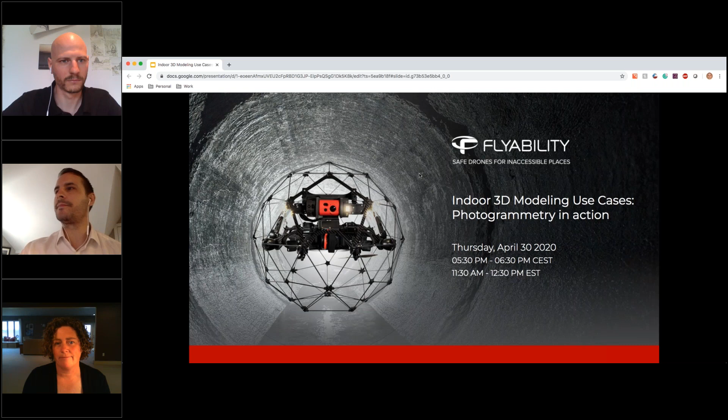And our star speakers today, we're going to hear from Lori McBean, who's a geospatial data specialist at UAS Inc., based in Sudbury, Canada. She's got a ton of experience visualizing data. And so she's going to be speaking to real use cases for indoor 3D modeling. This is something she does every day. We're really excited to hear from her and learn from her expertise.

And we're also going to be hearing from Gregory Spearlett, our professional services engineer here at Flyability, of course. Gregory's traveled the world doing trainings on the Elios 1 and Elios 2. He has a lot of experience doing hands-on work with inspections, so we're going to be hearing from him on the drone side of things. So we're really excited to hear from both of these folks today.

Really important point. We were actually talking to Lori just before we got on. Originally, she was supposed to be a keynote speaker at our user conference in March, which was going to be held in Denver, near the location of our new US office. But unfortunately, that couldn't happen because of the pandemic. And Lori was just saying that she'd much prefer to do this in person. I think a lot of us would, right?

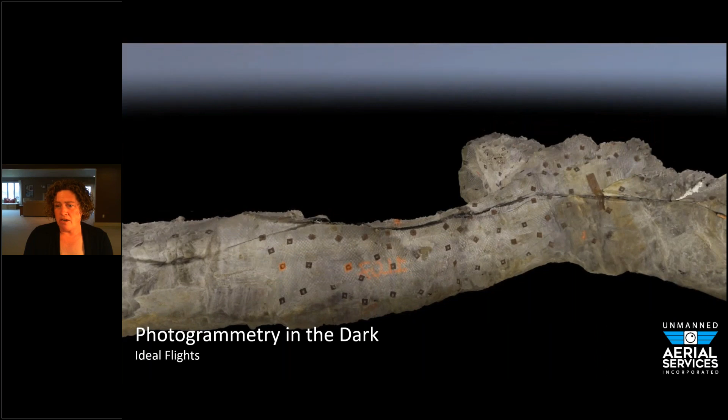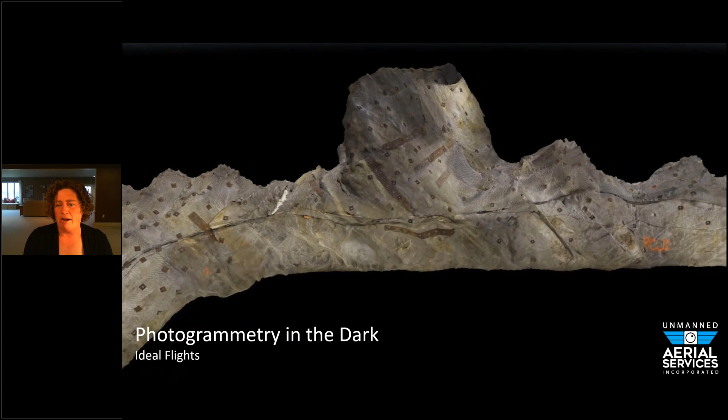So is there any technical problem with modeling underground? Absolutely not. So this is an example of perfect flight lines. You can see that despite the fact that this is all completely in the dark, the Elios provides more than enough lighting to create a well-lit model of a 3D underground environment. Now, you have to note that this is with perfect capture. So this is 4 flight lines, one along each of the ribs and one looking up at the corners. And we can piece that together, no problem.

This model actually took zero effort on my part. It was 4 video files brought into Pix4D with a couple of manual tie points only to join the flight lines together. But other than that, there is very little done to this model. This is basically click and go.

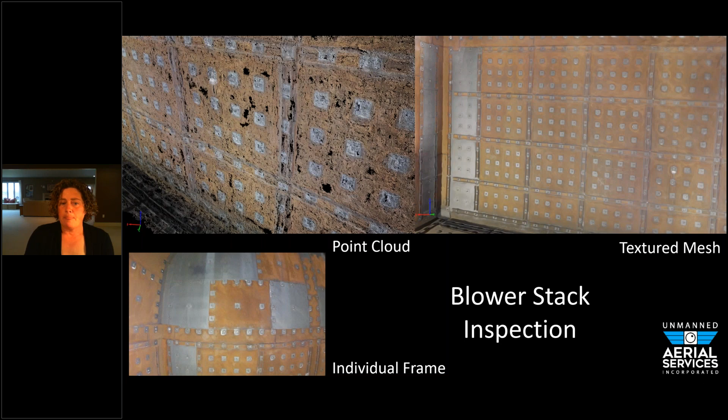And a similar example, this is a blower stack inspection, a large space. We had very good access to this space, so we were able to fly with ideal flight lines. You can see that you can generate a very nice point cloud, and your textured mesh comes out looking very, very nice compared to the individual frame, which obviously shows the fisheye lens and the effects on the geometry of your features. But if you look at the flight lines, we had very good capture.

So our pilots, like Will McKeever, are very, very talented at performing these inspections and covering the ground. And we've worked really hard at establishing what type of flight pattern works well for photogrammetry. All of this said, these are places where we have really good access and really good control. So I want to look now more at the realistic environments that we work in.

One of the main things that we do a lot of visual inspections on are bins and chutes. So they're really inaccessible. We don't have a very long time to capture them. They're narrow, and we never get an ideal flight pattern. So these will never be captured in terms of a photogrammetric flight. They're perfect visual inspections and give our clients everything they need just with the video, but we like to turn them into something a little bit more.

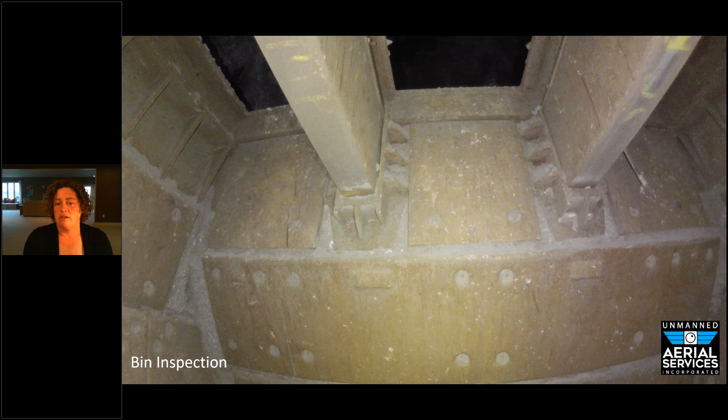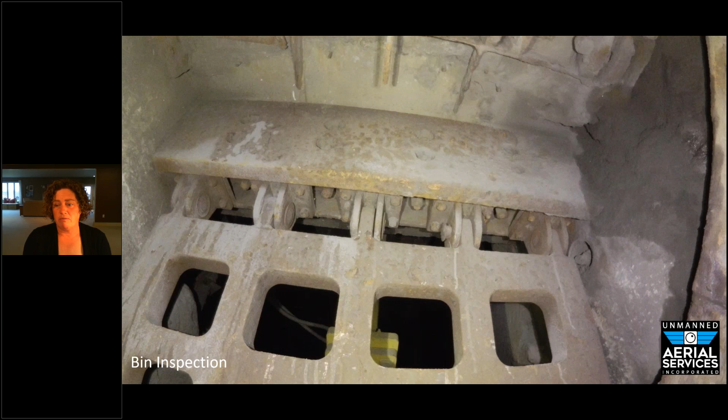So this is the type of environment. It's dark. All of the lighting is coming from the Elios, and we can get in and look at the things that the client is actually asking for. They want a visual inspection of this space. They want to look at their liners. They want to look at their mechanisms. And you can see that really they can see everything that they need to see just in the video. We don't really have a need to model this type of inspection.

However, we get into environments where they might be missing plates. A lot of these rock areas are self-mining. They erode and they create pockets and new spaces, and that needs to be measured. Also understanding the drawings that we have for these spaces, everything might be perfectly lined up, but once you get in there, you start to realize that plates, like on the right-hand side here, don't line up perfectly. And so that's sometimes the source of the wear and the abuse that these sites take.

So despite not being a photogrammetric flight, nothing specific about how we capture these flights, just a regular inspection, we can turn them into a fairly complete point cloud and a 3D mesh. They're not perfect. They're not going to win any beauty contests, but they provide us with a lot of really useful information. So the 3D mesh allows us to understand the things that we see in the video have a context. They have a location. We can tie those features to a place. We can map these all in mine grid coordinates, which means they can overlay them on any of their drawings.

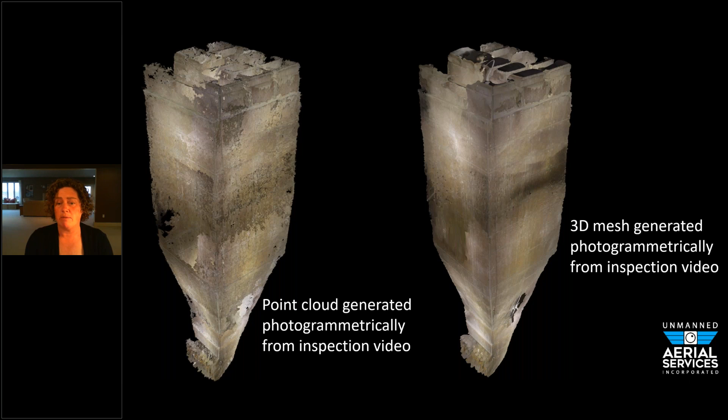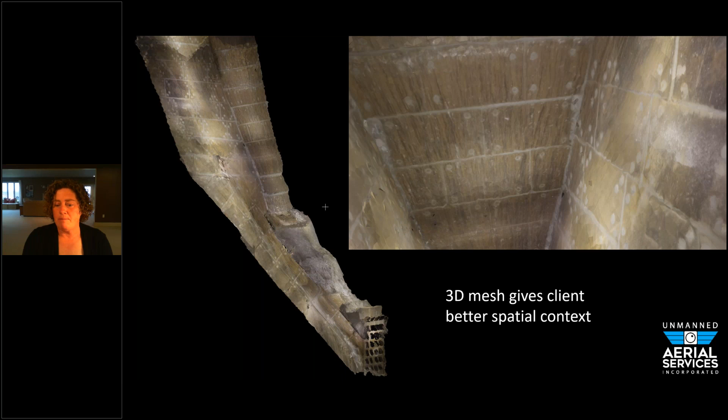In this particular case, we were looking at the space over the chute where the liners were missing and looking at the volume that was being eroded into the rock behind. And the 3D mesh can give us a really good idea of where that might be happening. But we can also look at the point cloud and the 3D mesh in terms of actually doing measurements, creating volumes, and comparing to what we thought was the case. So we can compare that then to the drawings, to the as-built. We can model what's going on. So we can produce that 3D mesh, and it's all coordinated, and it can go into comparison with any of their other data sets.

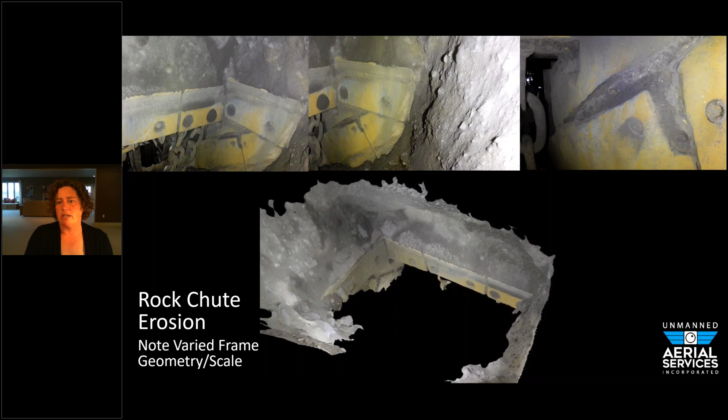So here's another example of an area that we get called into regularly, which is to monitor erosion above the head blocks where we have wear plates. You can see that in this case, it's eroded some of the rock behind there. The feature I wanted you to note on this is that if you look at the frames at the top, those 3 frames are all captured from slightly different points of view. They're obviously not ideal for photogrammetry.

If anyone has attended the photogrammetry webinar last week, we know that we want to fly in nice straight lines with good overlap. That's not our reality. In our reality, we get as much as we can in very few minutes. There's material coming down constantly. We try and fly as much as possible in a very short period of time, and then we model the best we can. And you have to throw it out to something like Pix4D to be able to manage taking different frames and different geometries and pulling that all together into a really useful model.

And this type of model, I would be using dimensions of those wear plates to scale the model and create something that's a metric data set that we can take measurements from and identify the volume of material that's been moved.

And this is another set of bins and chutes that we looked at last week. So 2 6-minute flights. Is it complete? No. So this was not flown as a mapping project. This is an inspection to look at areas of concern. There was a very short window to get in and cover this ground. So this is what we can produce with any inspection video. So any of your Elios videos you can run through and get a model of pretty much whatever you've covered.

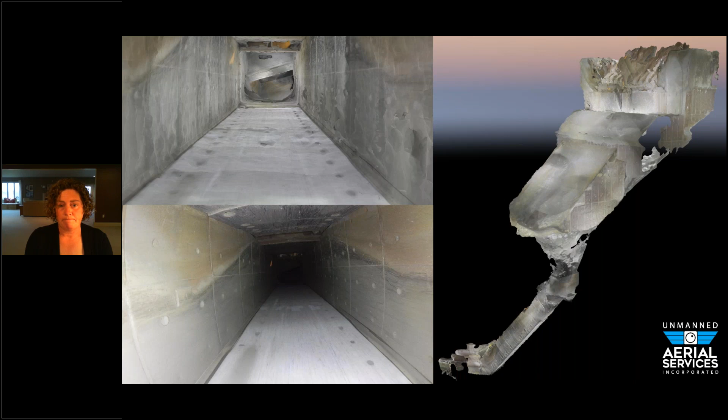So the photo at the bottom is an example of the type of access we sometimes have. So in the middle of that chute system, our pilot had to go through this very narrow little collar with obviously rocks suspended above the drone and a nice challenging environment to work in.

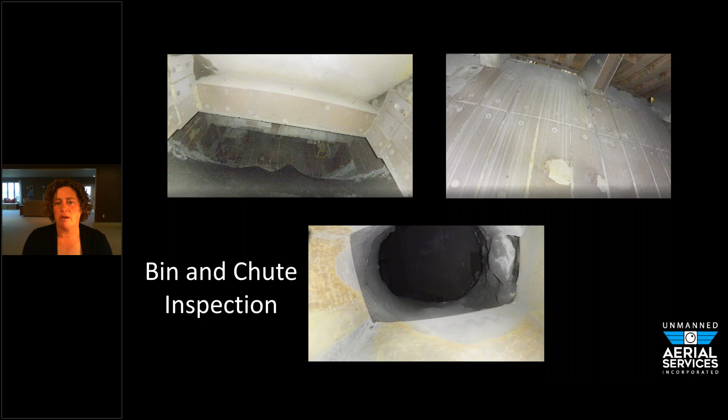And again, at the top, you can see that we capture a lot of frames with very differing geometry. We don't often have that ideal geometry, and yet we're still able to pull together a really reasonable model that gives us a lot more information than if we didn't model it at all.

And another area that we get called out to very, very often are mills. We fly them regularly for inspection. They're very difficult to open to provide better access, and it takes a long time. So the in-person inspections are really only done in shutdown periods. So this allows us to get in and out in a very short window from an access port and monitor

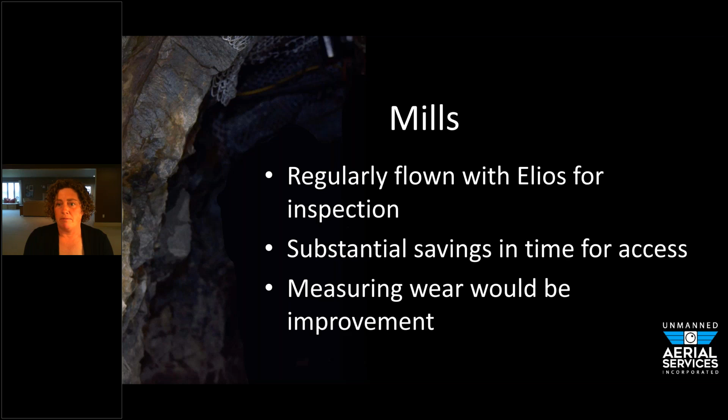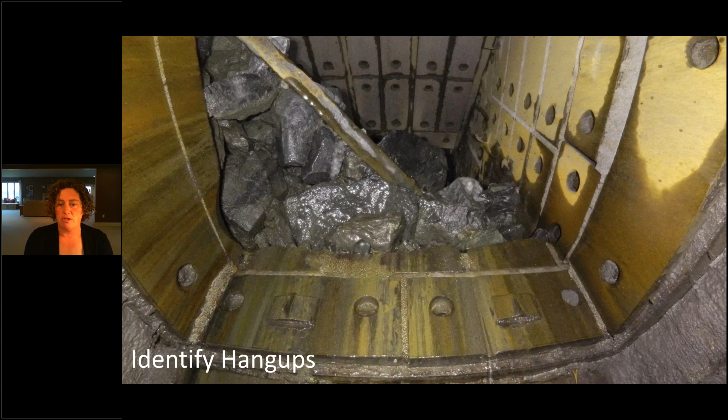the situation between shutdowns. So we can get into the chutes and identify things like hangups and what that material is, what's holding up the flow of material through the chute system. And then we can go into the inside of the mill itself and start looking at the wear on all of the wear plates and the materials inside.

Again, what I have to stress is these are not ideal situations. We do not have perfect capture. There's a lot of variation in terms of the geometry of the features that we're mapping. And we have a lot of noise, dust, and mist and other things affecting the frame capture. So if you look at the right-hand picture, you can see the effects of the reflection.

So as the drone is the source of the light, when it moves over a curved surface, that reflection follows you. And that poses a lot of really big challenges in terms of photogrammetric mapping. So basically that reflection causes those rounded surfaces to disappear. So that's a challenge that we still have to deal with.

There's things we can do to modify that. We can kind of turn off a lot of the front-facing lighting, which helps to cut down on that. And we can fly in slightly different geometry and try and make up for that with capturing those features sort of off the center of the frame.

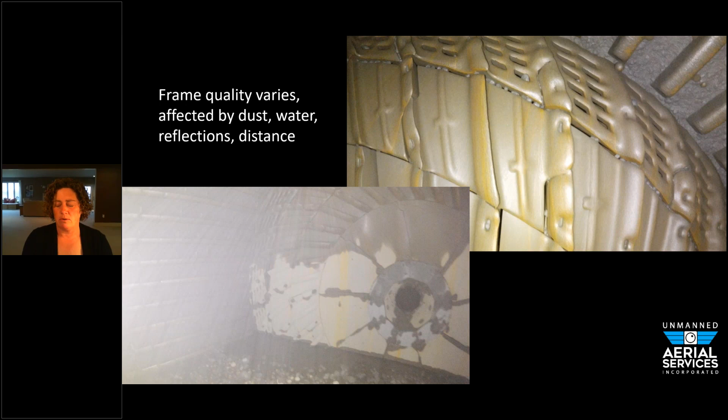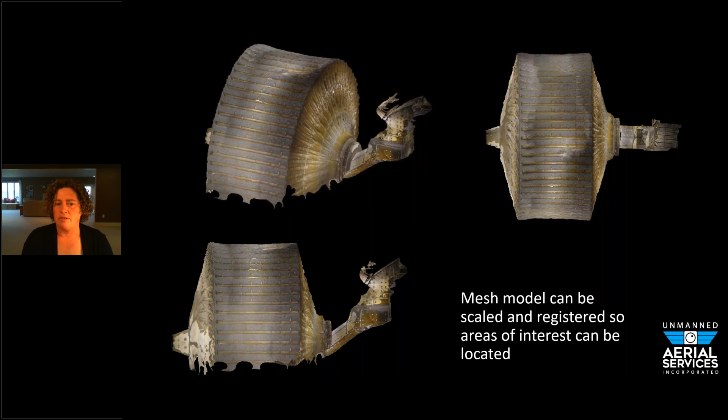So from that type of flight, we can create a 3D model, and the 3D model is useful in terms of locating where in, let's say, a drawing set the features of interest might be. Certainly, it's useful to present that information. It's obviously not going to be as beautiful as the video itself. It doesn't have the same visual clarity that the video itself has.

And if you notice, there's a little bit of a geometry issue at the corners of the mill. This is something that we learned through some of these flights, is that when you rely on that overlap in the outside edges of your fisheye, it's very difficult to pull that model together.

So now what we do to compensate for that is we definitely fly a separate flight line along those edges to try and bridge from one plane to the next. And that's something that I recommend if you're trying to do modeling.

So obviously the biggest spaces in mining are the stopes. And a lot of the original tests for the photogrammetry with the Elios were done in stopes. It is very useful to have that visual content for geology and for operations who are trying to solve specific problems. But stopes are actually a very challenging environment for photogrammetric mapping in terms of lighting. Lighting has a limited range and it's very dusty, so it drops off very quickly.

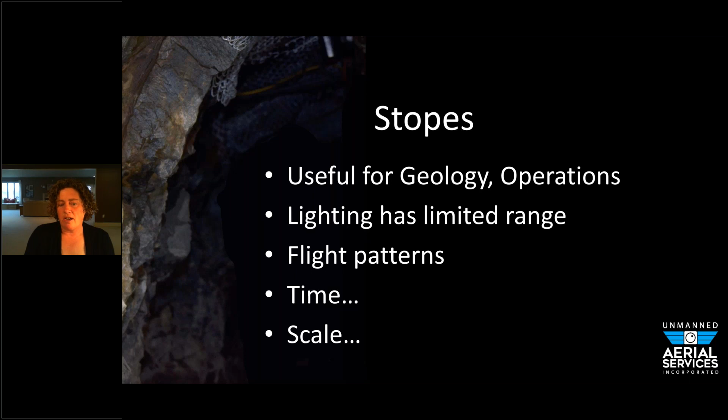So your flight patterns, you obviously don't have the ability to pre-plan your flights. You don't know the space necessarily extremely well, but also just covering the amount of space that is in these stopes. They're very large. So the time that we have available and the size of these spaces really limits what we can do in terms of mapping stopes.

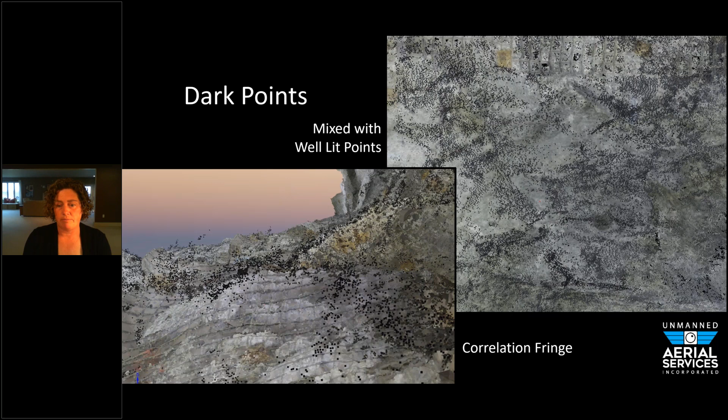Now the left-hand side, these are the problem points, and whenever you capture imagery with Elios and it overlaps with the black background of looking into the distance, you'll get fringes of black points on your features. And this is really the problem that we have in terms of cleanup when we want to go ahead from extracting our point cloud and then creating a 3D model. Visually, those points basically disappear when you turn it into a mesh. So they're not really a terrible problem once you move on to that.

So really the core of what we use the Elios for most of the time are ore passes. Ore passes are very narrow spaces. We have very little other options in terms of sensors that we can get into these places. They tend to block up, and the blockages cause a real problem because we're shutting down operations at that point. You're not moving material, you're not making money. The conditions inside the ore passes tend to be really rough. As you saw, we have dust, we have water, different situations, and we're always knocking down material.

Ore passes are operational spaces. Some of the projects we've done recently, you're waiting in between blasts to get in there, and you have a few minutes to capture as much as you can. Quite often, we have no other information available. Sometimes the ore passes are shown on a drawing as a nice straight line. That's very rarely the case. Over time, they change shape, and sometimes we don't have an accurate model of where they are. So any data that we can collect in these spaces is really valuable. We don't have a lot of other options.

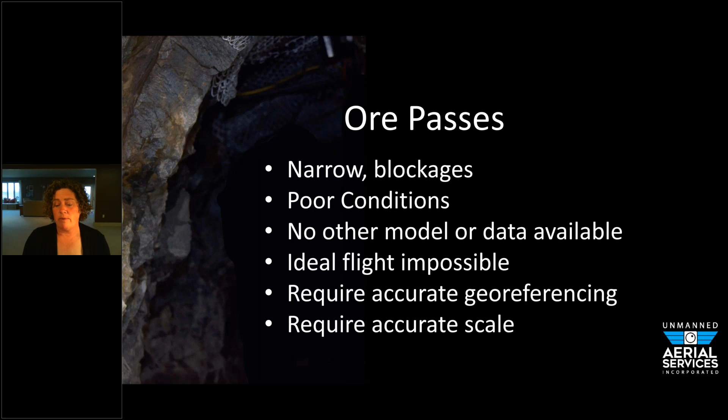Ideal flight pattern is never an option in these spaces. They're much too small. And we do require accurate georeferencing to tie to the rest of our mine model, and we require accurate scale, obviously. So how do we accomplish that?

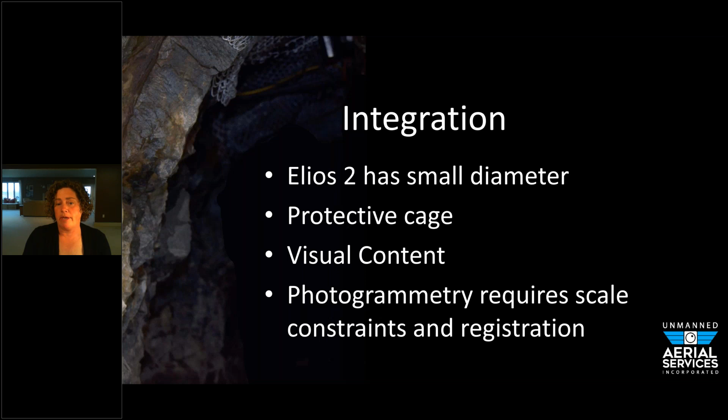We tend to do a lot of integration with our other scanners as well. So we have the nice Elios with the small diameter. We can put it into incredibly small spaces. It's got its protective cage, so we can be really, really trusting of its ability to get in and get out. It offers a lot of visual content. So sometimes that's the main goal of these flights into the ore passes. And the limitation is that we still require a scale constraint and some referencing to put this into actual coordinates.

Our other systems include the Hovermap mobile LiDAR. It flies on a really large platform, so it's sometimes very limited in terms of getting into these tight ore pass spaces. It does produce nice clean point clouds with clean edges, and it collects with an accurate scale. The problem is it doesn't offer us any visual content, so it doesn't give us a lot of feedback in terms of what's going on inside those ore passes. So this combination is very powerful. We use it quite often.

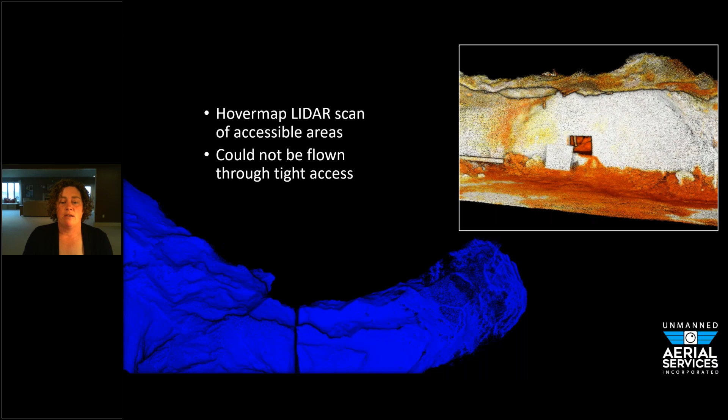As an example, we had a large engineering project that we were working on. We were able to scan large sections of the area of interest, but we had areas that were very limited where we couldn't actually access. So if you look on the right-hand side, you can see we had a very small access port into an unused section, and we needed to get into there to access an ore pass that we know to be blocked. We can't put our LiDAR scanner through there, so we look at this as a combination. So the bottom shows you the point cloud that we scanned, and then we were able to send the Elios in through that port and fly up to the area of the blockage.

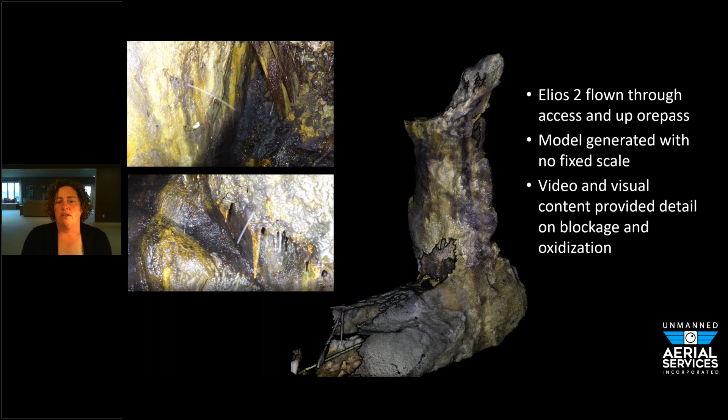So the nice thing is we have the visual content. The video is there. We can take a really good look, and the engineers can take a look at what's causing the blockage, what has to be done to remedy the problem. And we also get the 3D model. So photogrammetrically, we can extract that, we can combine it with the laser scan in order to do the referencing, so it's all coordinated, and to produce the accurate scale.

And now what we can do is integrate that and create a 3D mesh that's continuous mesh for all of those spaces. So that's an example of how we combine our systems to be really complementary. We get the visual content we want, we're able to get a model in places we can't access, and we still have the ability to produce an accurate spatial model as well.

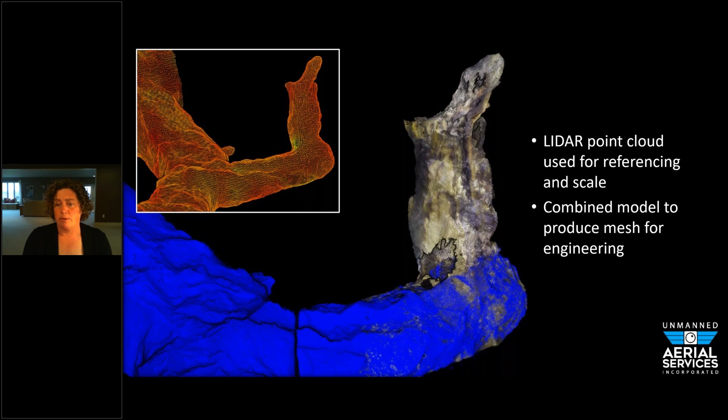And this is an example just from last week. We have a critically blocked ore pass, and again, they're trying to pass material through this space, and finding that they're not seeing the throughput that they want. They understand that there's a blockage, and we have to go in and identify what's going on. So we can fly in with the ELIOS and produce the visual model.

We have a partial scan with our LiDAR because we can kind of get it to the bottom of the area, but we can't get that to the location of the blockage like we can with the ELIOS. So we use the ELIOS, we have the LiDAR for scaling and to reference it, and between the two we can build a 3D mesh. And the point is, it's again, not 100% complete, but it is more information than we have from any other source, and we can't get this information in any other way.

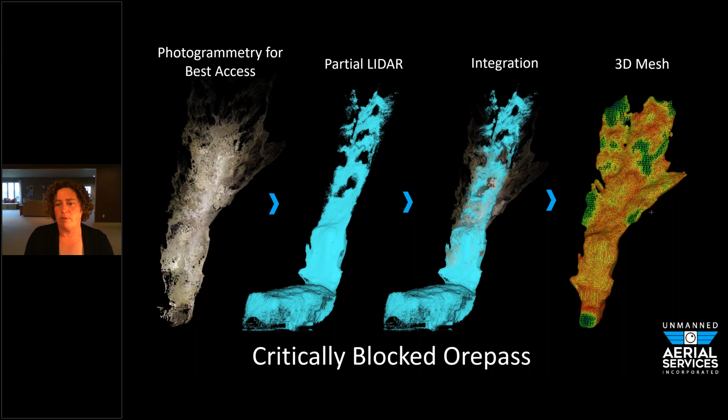So we were able to provide them with a 3D model. They know where the blockage is. We were able to go in and measure the size of the blockage, take a good visual look at what the blockage is, and then come up with a plan to remedy that.

We also do some surface infrastructure for the mines. Again, even though it's surface, we still have time and access restrictions. These spaces are very dangerous, lots of hot metal. You have very limited access locations, so you can't just go into a building and occupy the building. You have very limited points where you can go. And the scope of the project is really important to consider when you're planning these, because we don't often go in and map an entire building with the ELIOS. We have very targeted jobs that we do with it.

Structural modeling is still challenging. Getting clean edges on things like metalwork is still a big challenge for photogrammetry. And often lighting is still an issue, just like it is underground. So we still have all of the same issues, and we solve it in much the same way. So as an example, we went into a building where they had a project to run some new ducting and infrastructure up through the roof. They needed a detailed model.

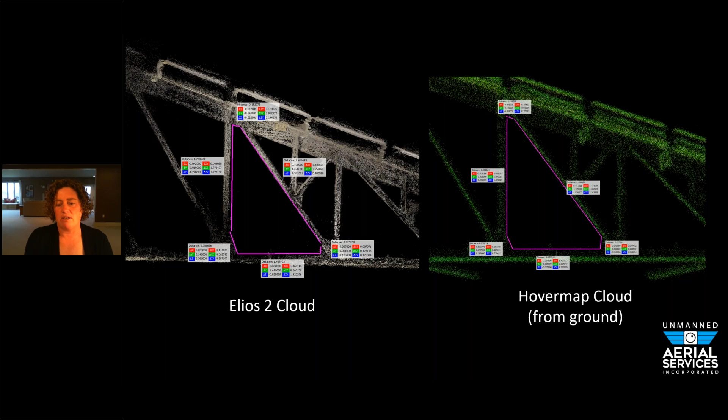So why would you bother modeling your inspection? We talked about this a little bit in the webinar last week. There's not necessarily a need to model every inspection. Certainly we get called out to do visual inspections on a regular basis, and the point is the visual inspection. The operations guys want to see what's going on with their site. We don't often go into this with the intention of producing a full 3D model exclusively, but having that model gives you the context of, okay, we can see something going on in the video, but where is that in space?

And that's what modeling really gives you. And the ability to compare that then to your as-builts. So we have existing drawings, we have existing data where we have the ability to overlay that data and see what's changing and what's happening and measure volumes and displacements. That's really powerful.

We want to be able to make accurate measurements. So although you can look in a video and identify features, the ability to actually create a concrete measurement out of that is nice to be able to do. And overall, it gives you better communication. You can look at a video, and quite often when I watch the videos that our pilots bring back, I don't necessarily understand exactly where I am in the space, but by the time that turns into a 3D model, we can communicate much better about where features of interest lie.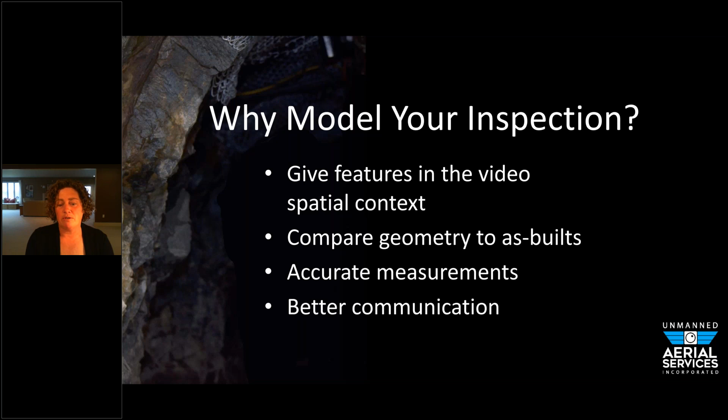So here's the big point of me presenting today. I want everyone to understand that your clients and the users of this data have extremely high expectations. Everyone has watched a YouTube video or seen a model that was produced somewhere, and they want that. They want the perfect product. They want a continuous 3D model. They want it to be the full resolution and crispness of the beautiful 4K video. But they also want to be able to measure to 1/8 of an inch on any model you produce. And they will give you about 10 minutes to do that.

We have very limited windows in terms of capturing things. And the biggest problem that we struggle with clients is how they consume that data. So they want it to be really, really small and compact, and they want it to be really portable. They want to be able to view it just by clicking on a link or moving it around. And the reality is we cannot achieve that. And despite the fact that I am absolutely blown away at the success of modeling with photogrammetry out of the ELIOS data, managing these expectations is really a large part of what we have to do.

So part of that is understanding what your client is actually trying to achieve. So if they need data for measurements or CAD, the point clouds are an excellent source. They are noisy. They tend to be not 100% complete just due to the nature of how we capture the data. So understanding that you can still make extremely accurate measurements with your point clouds is essential, even if they don't make the most visually beautiful products.

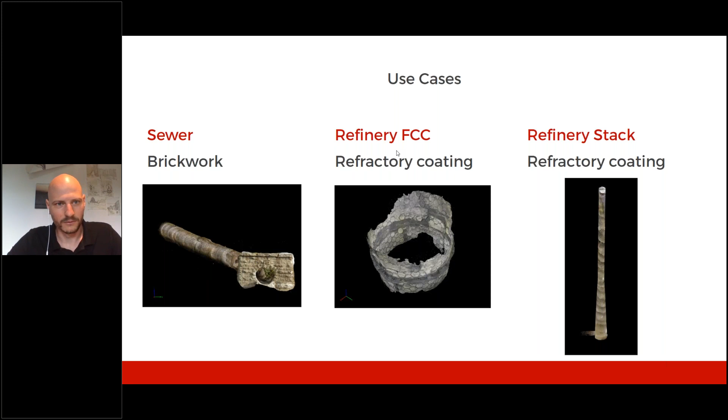So the first one will be the sewer, and this is really like a data localization kind of use case. So the idea was that we found defects in brickworks and obstructions in the sewer itself.

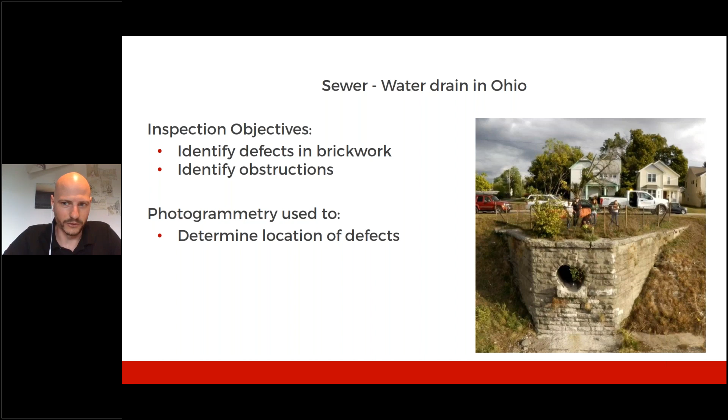So this is the video. That's what the video looks like. You can see a not very subtle defect on the right-hand side. But you can imagine if a single brick were missing, it would also show up on the video.

The only issue is since you only know the location of the entrance of the tunnel, and assuming this is an unmapped tunnel, you can't really measure from the video exactly how deep you are inside the tunnel. So repairing this, assuming it would require digging up the streets and repairing it from the exterior, you would have a hard time finding the defect if you're just digging randomly.

So this is where the 3D model really comes to shine, because in Pix4D, if you click on any point of the 3D model, you will see on the lower right-hand side an image of the frame that's corresponding to that particular point on the cloud. Also, you can make measurements.

So by clicking between the entrance of the tunnel to the actual point where you find the defect, you can see here that it gives you a length in either meters or feet or any unit you can set up in Pix4D. So that is really where the extra information here came from. So even if you don't have an extremely pretty model that has no holes and extremely high GSD, simply this feature kind of made it worthwhile to make the model.

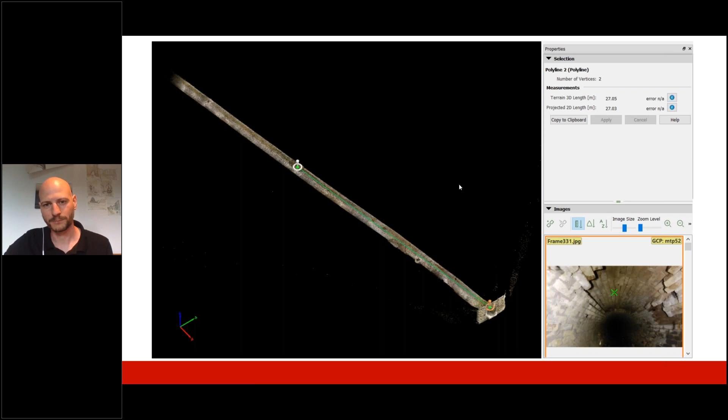And here's a little video showing you how well the model turned out. So I'm hoping the frame rate you're seeing is doing this justice, but well, you could probably also do the inspection on the model itself, especially for the bigger holes. You can see them pretty clearly. But first and foremost, the video data will be a lot better anyways.

So just to give you a few stats on this mapping project, it basically consisted of one recon flight and one 6-minute mapping flight. And then the images exported for making the model were all on the way in, basically. So it's just flying straight ahead. And the image I showed you, where you saw the big hole on the right-hand side, that's basically the orientation of the camera as you're flying into the tunnel.

And then you just export, say every 5 frames, an image, throw that into Pix4D, and then you can go ahead with the scale and orientation constraints. So in this case, we used the entrance diameter for scale. It's not very accurate, but it's what we had. The entire project was about 500 images, which takes about 1 hour on a pretty high-end laptop.

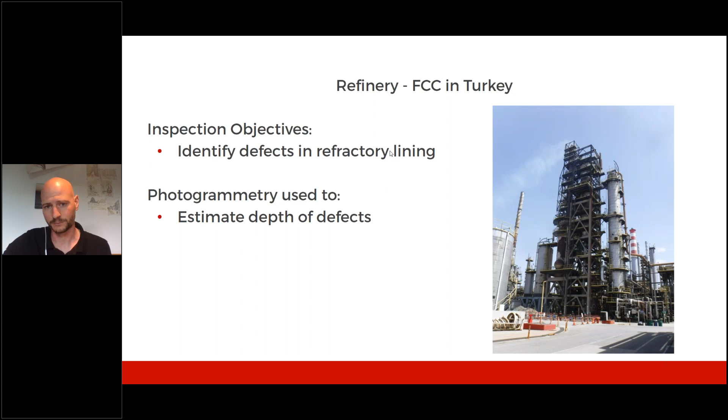So for those of you who are not familiar with what an FCC unit is, it's basically the part of a refinery that turns heavy oil into gasoline, like lighter hydrocarbons. So basically heavier stuff like diesel goes in the bottom, and gas that you can put in your car comes out the top. This is quite an essential part for operation. These things run something like 24/7 for 5 years at extremely high temperature and flow rates.

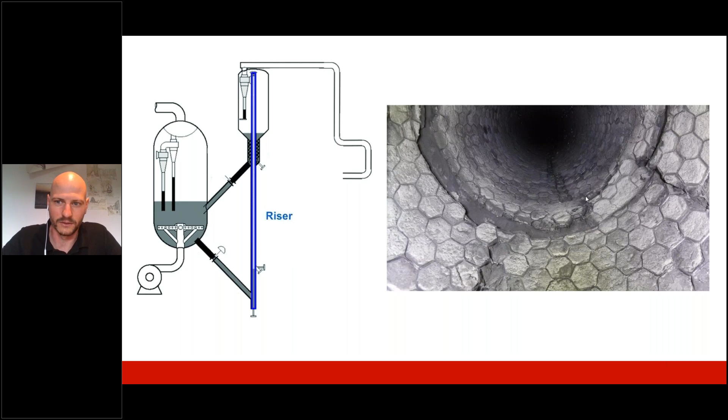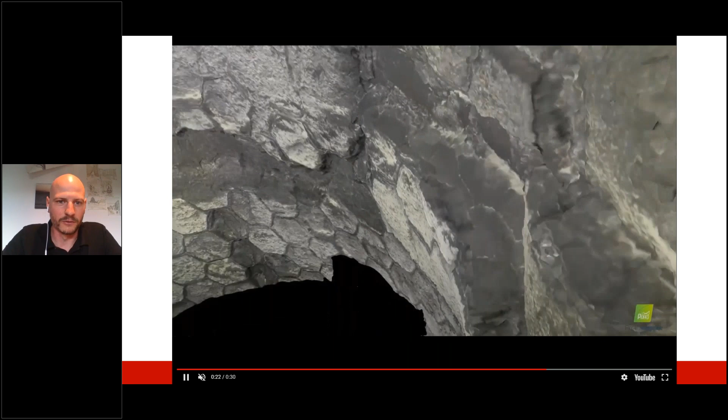So the thing you see on the right, that's what the refractory lining looks like. It's a type of heat-resistant cement that's embedded in this hexagonal mesh structure. And this is the model we've managed to make of that. So the reason this turns out so nicely is because the hexagonal mesh structure and the texture of the cement really give the Pix4D software a lot of texture to grab onto, to create tie points and to triangulate those into a 3D model.

And actually the added value of this modeling was that they could quite accurately estimate the depth of this abrasion that we're seeing in this joint between the two mesh panels. And I was on site for about 2 days. The first day we did normal visual inspection, just going up the entire pipe, which is about 50 meters high, 600 millimeters diameter.

And we saw this defect, and at some point, the entire inspection department of that refinery found itself around the table looking at the video frame by frame, trying to see if this defect was a problem or not. And then the next day we went in again to exactly that point, made a quick model, and then instantly it became obvious that this was something they could leave as is for another cycle. So that's really where the value comes from: instead of guessing whether this is a problem or not, you can really know for sure.

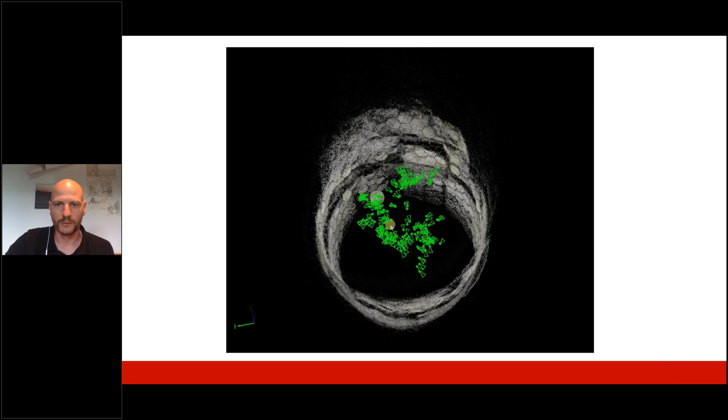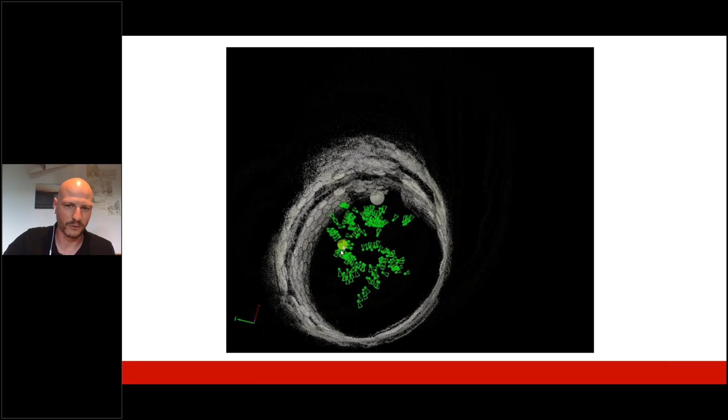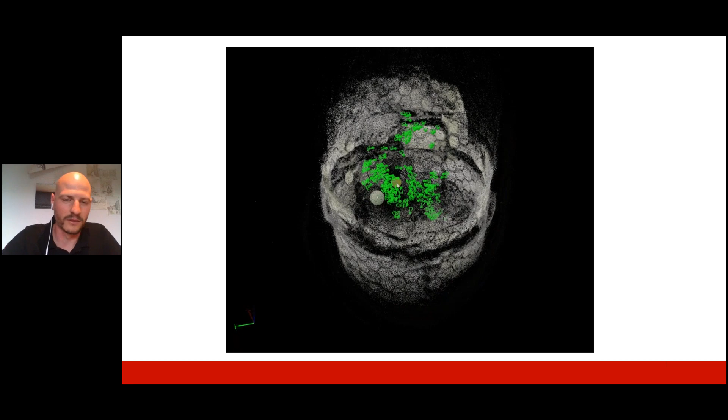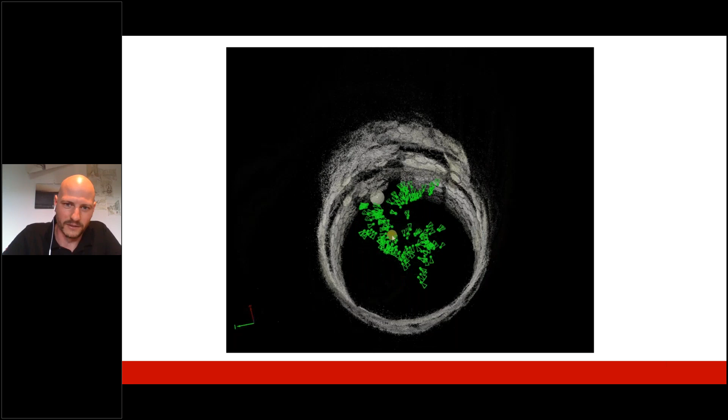And the way we went about making this model as a flight plan was I just basically hovered around the defect, and because it's quite a narrow tube, I had the back of the drone against the tube the whole time. I just yawed around as best as I could, and that leaves the camera at more or less the optimal resolution distance, because it's a 600 millimeter tube, 400 millimeter drone. That leaves roughly 200 millimeters in the front. So that's more or less the focal distance of the camera.

So this entire project was 370 images. It was one flight where we did the whole length of the tube, and then one more 6-minute mapping flight at the specific level. In this case, it was 28 meters above ground level. Exported the images from the video and then put it on my relatively low-end laptop. It took about 3 hours.

I used the pipe diameter to scale, but to be honest, the inspectors didn't really look at the values that were measured from this model, just because these hexagonal meshes have a specific size. Their experience told them that this was not an issue, so this could be evaluated the next day.

Next example is the stack. That's one my colleague did in the USA. So this started out as also a visual inspection flight. And in this case, my colleague had the luxury of being able to spend a lot of time on site. So once they were done with the visual inspection, they had 2 batteries left over, so they wanted to make a model of the entire stack.

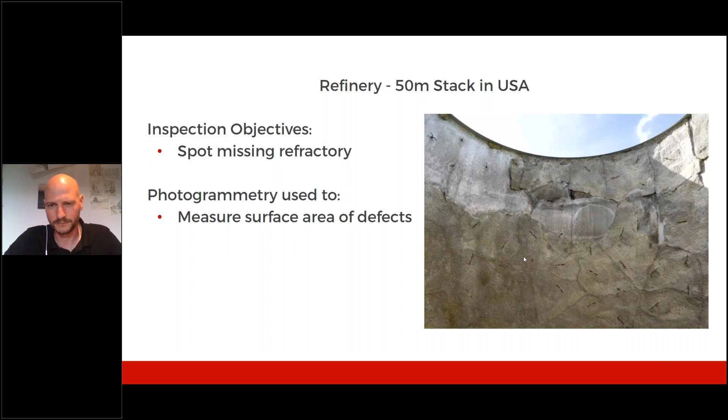And the idea of that was that instead of knowing just, okay, you have some refractory missing approximately this long at these locations, you would be able to measure exactly how much surface area of refractory is missing in exactly those places. So there are some issues with stacks, and some of them were already addressed by Laurie a while back.

So as you look up, the advantage there is you can see these temperature probes coming, right? And that's an issue. If you fly into them, you could get impaled or damage your drone on those. So you want to keep your camera angle up as much as possible, but that's going to degrade your image quite a lot, because in the close field here, on the top right, you can clearly see overexposure

close to the drone, and then there's a sort of ring of nicely exposed texture, and then in the distance it's underexposed, and you've got sunlight coming into the top of the stack. So that tends to create a lot of false points on your cloud. So just to compromise, I think here the angle is about plus 45 degrees, so you can still see some stuff coming, and you have a very nicely lit camera image.

And the decision here was to do the shaft. I don't know if you can see my mouse, but I'm on the left image. You can see that there's this kind of corkscrew green line in the stack, and that's the flight path of the drone. So it was decided to corkscrew up the chimney, and that gives you a decent coverage as you're flying up.

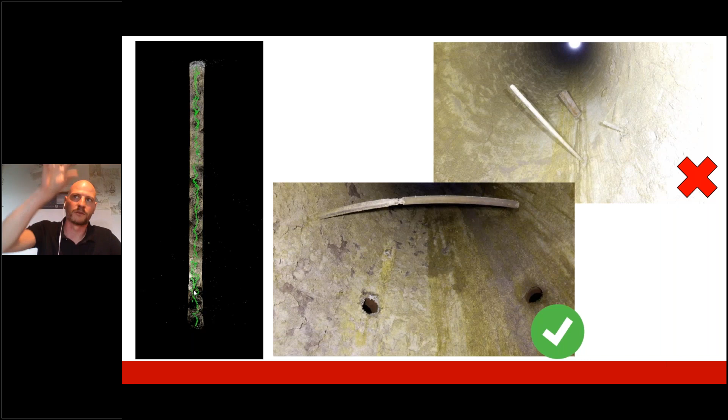It's definitely not as ideal as hovering in one place, doing 360 degrees, hovering at the next place 360 degrees, or just going up and down, scanning the whole side. But it allows you to do a quick and dirty model of the whole stack in just one flight as you're corkscrewing up, because you have to fly up anyways.

And then as you reach the top, you would sort of slow down and fly a bit closer to the wall to get at least a high resolution image of the place where the refractory is missing. Because during the reconnaissance flight, the initial visual inspection, it was determined that there was only refractory missing near the top.

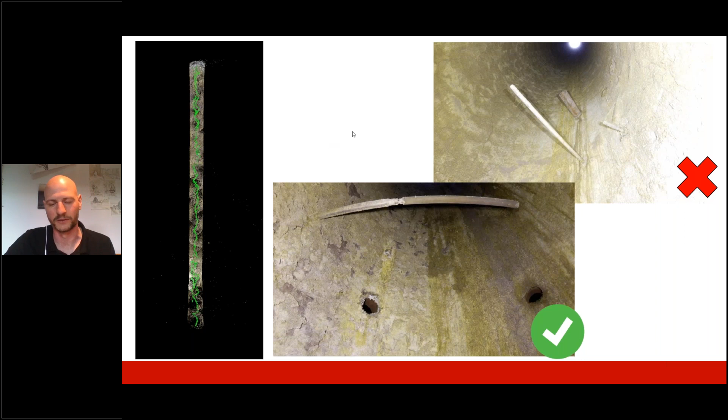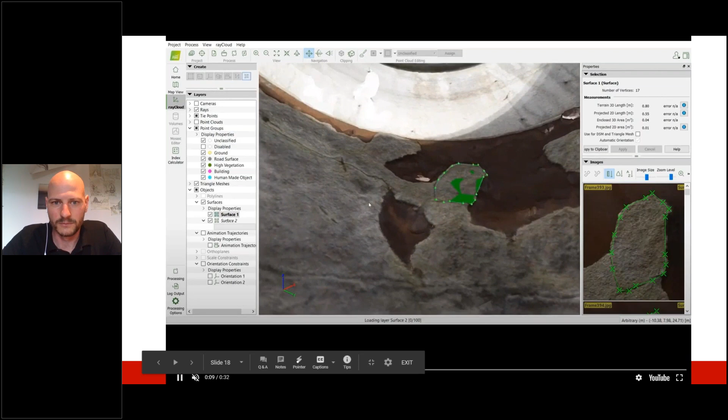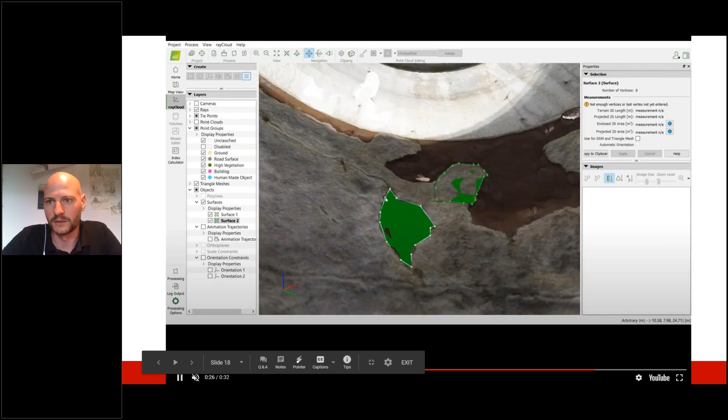This is just a quick video to show you how the surface measurement works in Pix4D. So it's quite simple. You go into the model, and this is already in the textured mesh model. You click on the surface area measurement tool. You trace a path directly on the 3D model, and then assuming it's correctly scaled, because in this case we used the stack height as a scale constraint, it's going to give you an instant measurement in the top right corner.

And as you reach the top, you slow down and take your time to really make a good pass on all of those places. And then later on, you can fill in the missing refractory and get quite an accurate estimate on what's missing.